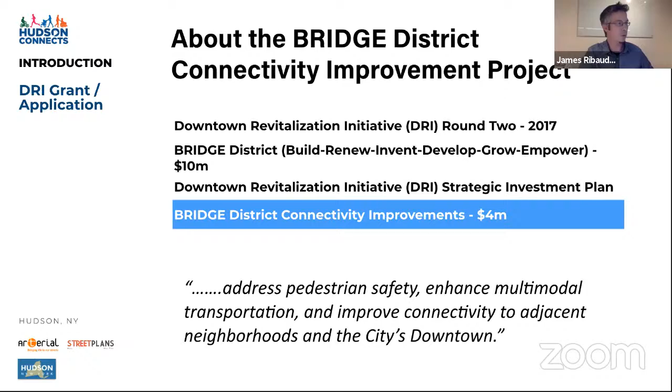From a schedule standpoint, where we sit right now is the fall, winter of 2020, where we're presenting the connectivity plan. We look to have a final submission in late January, and we'll have some more next immediate steps at the end of the presentation. And then the exciting part, which is getting into construction. The idea is to begin construction in the fall of 2021 so that this project will become a reality very shortly.

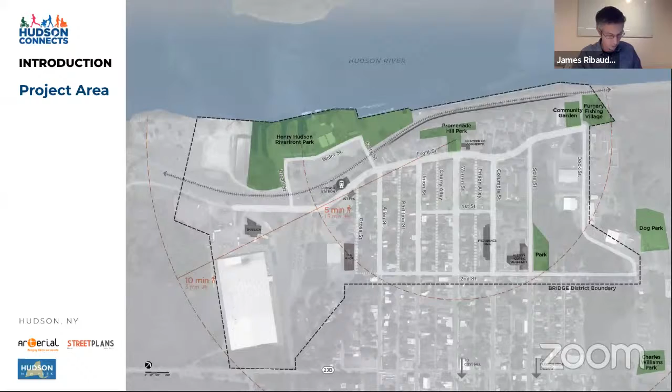So looking at the public outreach and analysis process, we wanted to just quickly take everyone through what we have been doing over the last several months with the project. So the first thing we did was we met and did a walkabout. We did a public workshop where we actually got on the street and we walked around with a group of people, and we took in all of the observations and the things that people saw, that they experienced from a day-to-day standpoint in their neighborhoods.

From that, we also then conducted our own, what we call a high performance street analysis, where we look at the condition of the streets. We see, in relation to the categories that Dave laid out, how the streets are performing in those categories, and what deficiencies may exist.

Third, we conducted a number of stakeholder meetings with various groups to understand the concerns and aspirations that both local residents and professionals had for this project. And then fourth, we had an open house down at the waterfront.

We actually combined this open house with the Promenade Hill Park project, which is another DRI grant that is concurrent with this project. And again, it was to collect some feedback, share some of the feedback that we've heard, put down on paper some of the initial thoughts and ideas.

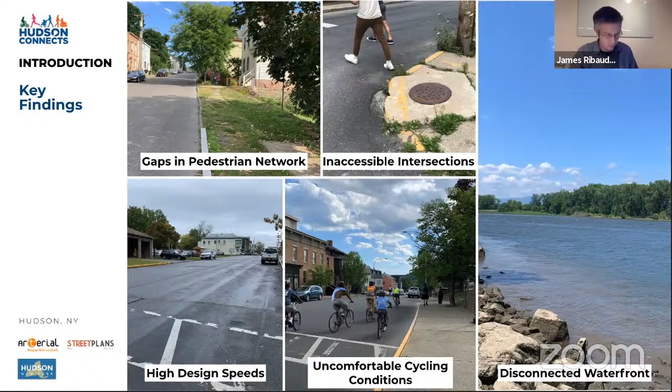Based on those key findings, we developed a series of goals that we feel will address all of these key findings. And the 3 goals that we're setting forth for the connectivity plan really address these findings. And they're not listed in order of priority, but really to best serve the presentation for this evening.

So the first goal is to celebrate the historic integrity. The second goal is to make streets safe and accessible for all. And the third goal is to reconnect the waterfront. And we'll elaborate on all 3 of these goals now as we move through the presentation.

So goal 1, celebrating the historic integrity. As one of the first planned cities in America, the history of the city is still evident today. And it's really an amazing quote that we think is very appropriate, just to remind us of the history of Hudson, that it actually has been referred to as one of the richest dictionaries of architectural history in New York State.

So the streetscape really should provide a ground plane that supports the historic fabric that exists in Hudson and does not detract from it. So the materials themselves should be authentic and reflect that history.

And I want to make a point of it here because it was mentioned in the survey on the demonstration project that the bright colors of the demonstration project were done to bring attention to the project and are not necessarily emblematic of the palette that we are proposing. And again, we are taking the cue from the history of the city itself.

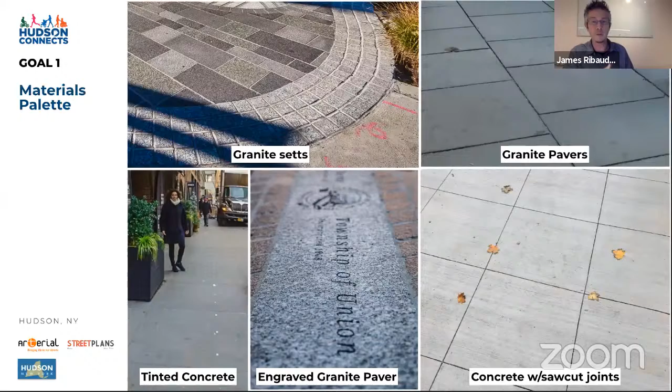The trash receptacles, the bollards that we may use, bike racks as you see, the tree pit guards, and then a family of benches that can be used in different situations where we may want to have a backed bench where people are going to stay and linger longer. We may want to have a backless bench so that you can sit on both sides, and a smaller bench for smaller areas and tighter areas and that kind of thing.

So the furniture and materials palette, again, we feel complements the diversity, the sort of richness in that history of Hudson itself. So with that goal, those are the visuals to keep in mind as we then start to progress through some actual improvements that we're going to show you on the street.

So coming to goal 2, where we want to make streets safe and accessible for all. So the way that we started looking at this was, the first step was to identify the streets based on their character and function. So looking at that, this helped determine for us the typology, which we've categorized here, which I'll go through in a second. But that begins to help shape for us what improvements should happen on what street.

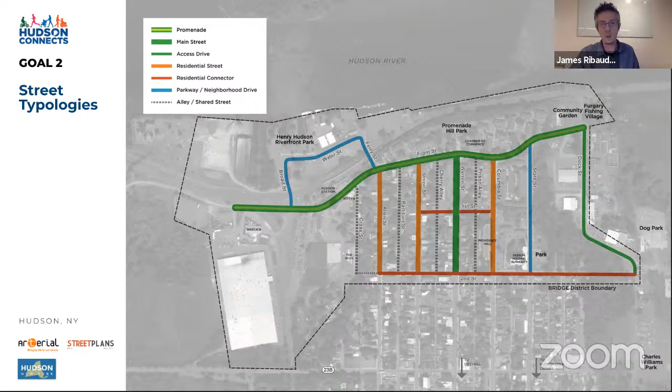And with that, we get to the intersections, because it's important for the streets to obviously be accessible, but if the intersections aren't, then those streets can't be stitched together. So it's those intersections that are very important, that they are, again, made accessible, given the right amount of improvements to really take those streets and stitch them together. And we have categorized the intersections within the district in 4 different categories.

The first being where the alley intersections hit the adjacent streets. And again, those are smaller interventions. Then there are the standard intersections. The standard intersections happen at various points within the city, and we'll go into their treatments as we move through the presentation. Commercial intersections are those intersections that interact with Warren Street, obviously being the main street in the city. So those have different uses around them. They have some retail and commercial spaces adjacent to them, whereas the standard intersections are more residential in character.

And then finally, the last category is unique intersections. And the unique intersections are intersections that have unique circumstances and situations and adjacencies that we feel should be addressed in a different manner than the commercial and standard intersections, and actually present opportunities to further express some of the character that we want out of these streets. So for instance, along Front Street, you'll notice some of the unique intersections land on those streets. And it's really a way in which we can tie the waterfront to those intersections and bring that connection from the waterfront to the city.

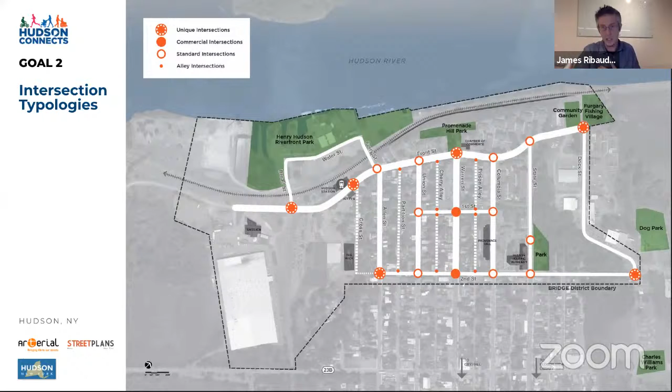The next layer is that of a bicycle network. And currently the Empire Trail comes down Mill Street, goes along Dock Street, turns on Front Street, and then comes back up Allen and out via 3rd Street. So naturally this places bikes on Front Street, which, given the number of amenities and destinations, we felt should be extended the entire length of Front Street, from basically Broad Street all the way to Dock Street.

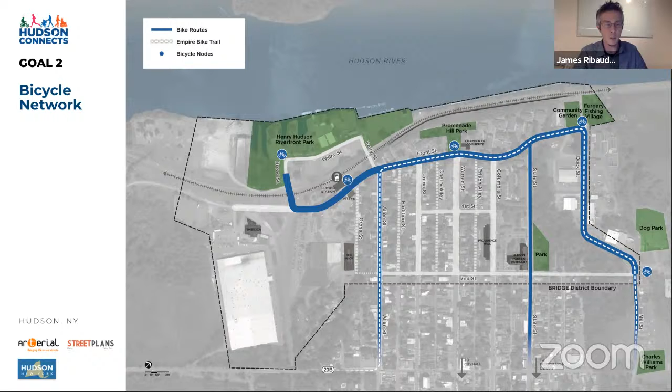And in an effort to better connect the rest of the city by bike, we've also identified Allen Street, which already has the Empire Trail on it for a portion of it, and State Street as the means in which the rest of the city can connect and move back and forth and get you all the way down to Front Street, to the waterfront, to the different park spaces that exist there. The other thing that we have layered in here are a series of bicycle nodes at key points you'll see in the parks, at the train station, that again support that infrastructure.

The next series of slides I want to quickly go through are the series of improvements that will be applied to various areas within the district. Things like pavement markings, lane and shoulder striping, consistency in the stop bars, high visibility crosswalks, all important when it comes to pedestrian safety, and then also cues to slow cars down and provide the proper movements for them.

The next is curb extensions, and there are 3 curb extensions that we see being utilized. A standard curb extension where we're extending the curb and maybe it's just pavement; using that curb extension as an amenity area where either outdoor cafe tables and chairs can be provided that can support local businesses, or public seating that the city would maintain and care for. That again gives people the opportunity to sit and relax, especially important from an economic standpoint as people are window shopping and that kind of thing. And then finally, utilizing curb extensions for green infrastructure where we can utilize plants and that kind of thing to infiltrate some of the water and take some of the burden off of the system.

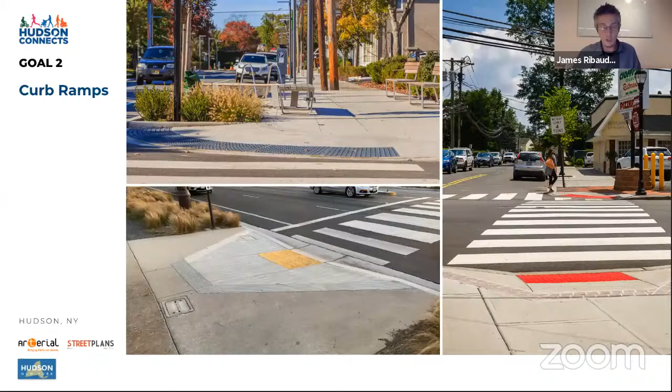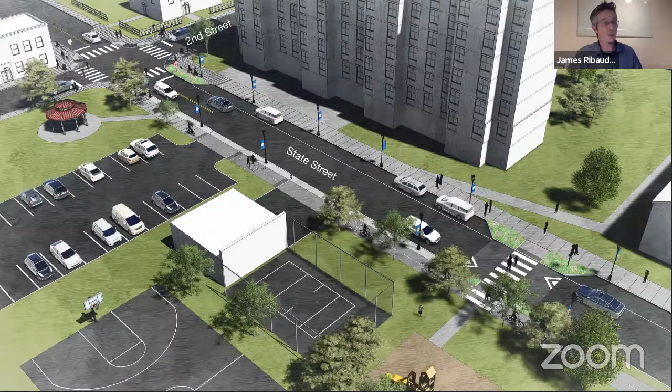And what we'd like to highlight over the next series of slides is the intersection itself and how we treat that intersection, taking, again, those elements and applying them to the street. We've talked about a shared use path. And again, this being critical because there currently is not a sidewalk on this side of the street. So we're looking at a shared use path that can connect 2nd Street all the way down to Front Street, off-road for people on bikes, people walking, strollers, to accommodate safely those users. And then finally, the last component of this corridor is a raised mid-block crossing, which you can see here.

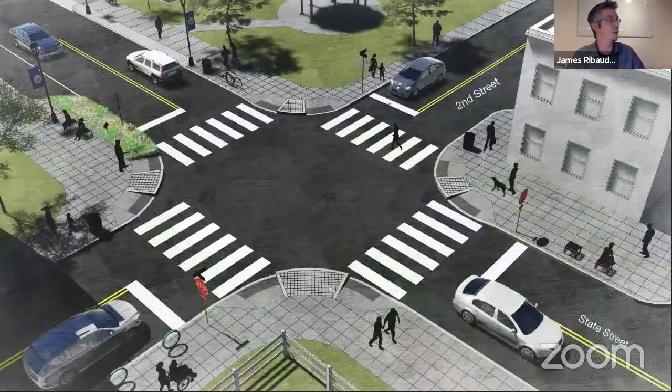So what I'm going to do now is put the intersection on the screen here, and you can see 2nd Street running from the bottom left of the screen to the upper right, and State Street itself running from the lower right to the upper left. And just going to highlight some of the improvements here. ADA curb ramps, high visibility crosswalks, the striping with the stop bars, stop signs, layering in some street furniture in benches and bike racks and trash receptacles.

In the left side of the screen on that corner, you can see where we've gained some additional planting, and that can be an area where we utilize green infrastructure. We can incorporate some educational signage in that. And these are the types of improvements that would make up this particular intersection, but could be applied to other standard intersections throughout the city. And we're also showing concrete saw cut lines in this image.

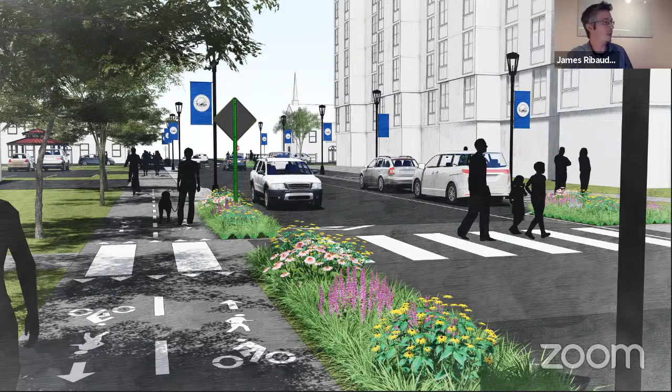I'd like to then move down eye level. If you notice here, we're standing down past that mid-block crossing, looking up the left side of State Street, where currently there is no sidewalk. And you can see this shared use path here, where again, people on bikes, walking, strollers, and that kind of thing would have a great facility to go from 2nd Street all the way to Front Street.

And then finally, within this corridor, showing a raised mid-block crossing, really bringing prominence to the pedestrian and their safety as they cross this portion of the street. There is obviously a number of residents that live in this area and that access the park on the other side there. So it's important that cars see them, and it's very visible with signage and actually tabling this crossing. So as you approach it, the asphalt actually comes up to the curb level, the sidewalk level, and levels off so that people are crossing at the sidewalk level.

And again, finding ways to incorporate some green plantings that bring color and bring some vibrancy to the street. We're also showing in this rendering for this corridor lighting, and we would have to again look at that if this is something that we move forward with in the first phase of construction, and how we supplement the lighting that's there currently. So that's an example of a standard intersection and how that can be applied throughout the city, an example of the shared use path along the State Street corridor, as well as a raised mid-block crossing.

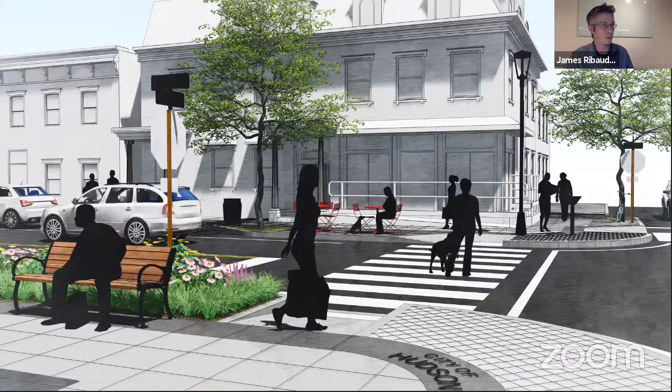So moving along to a typical alley treatment. And we're going to look at, this is Cherry Alley and Front Street. And the improvements here are simple. Basically adding a driveway apron to raise the level to the sidewalk so that it, again, gives priority to people crossing here. We are recommending maybe cobblestone aprons to, again, tie into that history. And then where possible, stop bars and signage to make sure that vehicles are stopping before going. So reinforcing that safety for pedestrians.

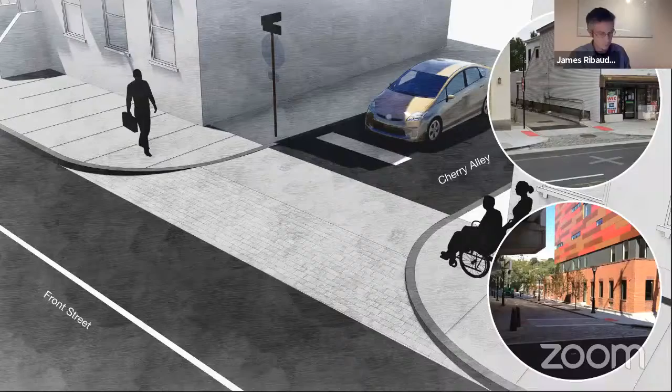So goal 3, last goal to go through, reconnecting the waterfront. Again, Front Street is this great street going the length of the Hudson River in the city. And we really want to celebrate the various connection points to the Hudson River. You have Henry Hudson Riverfront Park, Promenade Hill Park, you have the community gardens and the fishing village. And these things really should tie into Front Street and give Front Street that character that really connects it from the city to the waterfront itself.

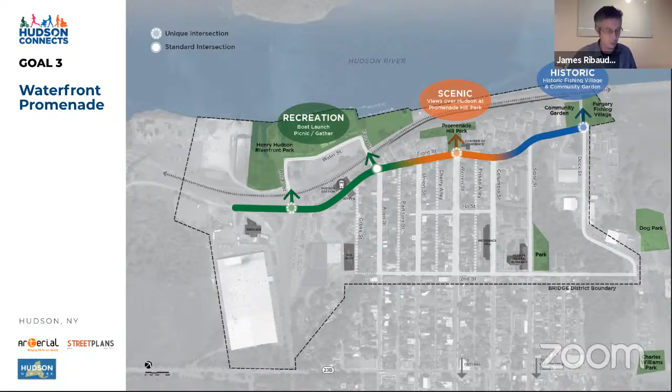And then looking at another spot where one of the demonstration projects was installed at Front and Warren Street. And we want to look at this as a corridor. So we're looking at Front and Warren Street, really Front Street from Allen to State Street. And currently, the way that section looks is like this. There's 10-foot sidewalks on either side, and parking and travel lanes that essentially add up to in the neighborhood of 42 to 45 feet, give or take, depending on where you are. Again, we don't have a survey at this point, but we've measured, and roughly that's the makeup of the street.

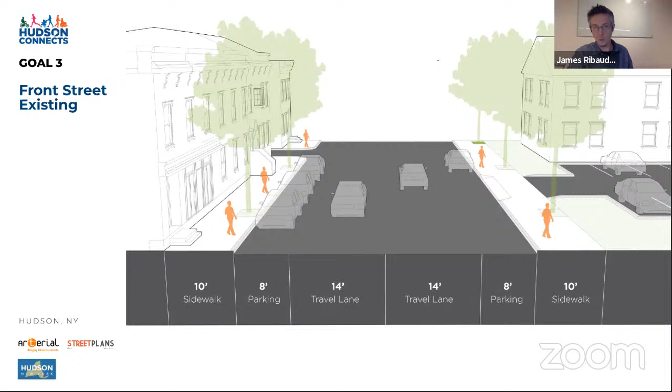And what we're proposing is changing the structure of the street and adding a promenade on the water side of the street. And we're doing that by taking some of the sidewalk and also taking some of the width out of the street.

And you can see that here. So the main point here to make is that we're looking at capturing a 16-foot promenade along the water side of the street, where we can have basically a 5 to 6 foot sidewalk, an 8-foot shared use path, and a 3-foot buffer, and keep the on-street parking that's there. That was very important as we move through this process.

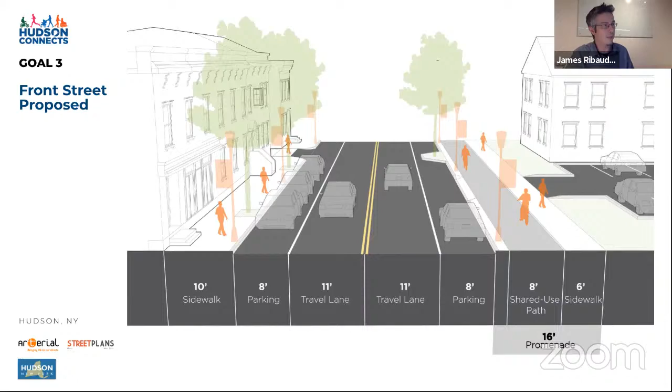We recognize that we have to get into the detail of this. There's minimal parking spaces lost with doing this. There may be a space or two or so that we may have to lose, but for the most part, we're able to keep all of the parking along that side of the street. So moving to a plan to see how that shakes out.

And then just dropping down to eye level here so you can get an idea of, again, what that may look like. The shared use path here in the foreground with the sidewalk. You can see the engraved granite paver there, Promenade Hill Park, some of the plantings and the boulders and the stones, the intersection being raised itself, really, again, accommodating pedestrians. So in a very quick nutshell, that's how some of these improvements can be applied.

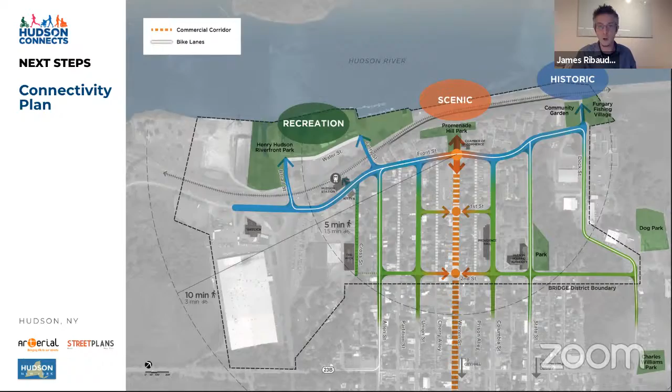And in terms of next steps, we are working on the overall connectivity plan. This is a diagram that kind of depicts all of those improvements and how all of that functions together to pull the waterfront into Front Street and how the streets stitch together, those intersections, everything like that, where we will then provide a level of detail that you won't be able to read most likely on your screen, but a series of matrices that outline each street, the different improvements that we're proposing, and which street gets what improvement.

So we're doing that for both the streets themselves and the intersections. So for instance, Allen Street needs to get concrete sidewalks. There needs to be some repair work and tree pits, and so on and so forth. So both for the streets and the intersections themselves.

And just to end on the project schedule in a little bit more detail, where we are right now is council presentation number 1. This is the first time we are presenting in front of the council. We plan on collecting feedback, getting some thoughts on what we've been proposing, making any revisions necessary, continuing to work through the plan so that we can give order of magnitude cost and start to talk about phasing and implementation of the project itself and what will be built.

So we will present on January 11th at the council meeting, where we'll focus more on what the project is looking like it's going to be for construction. We'll submit the final connectivity plan at the end of January, and then basically start to look at design and implementation of the project that is identified.

So with that, I want to thank you all for your time. And at this point, I'm not sure how this will work, but if there's any questions or different things like that you'd like to ask of myself, Dave is there as well. We can answer any questions that you may have. So we'll begin with council questions first. And I know Tiffany Garriga has a question.

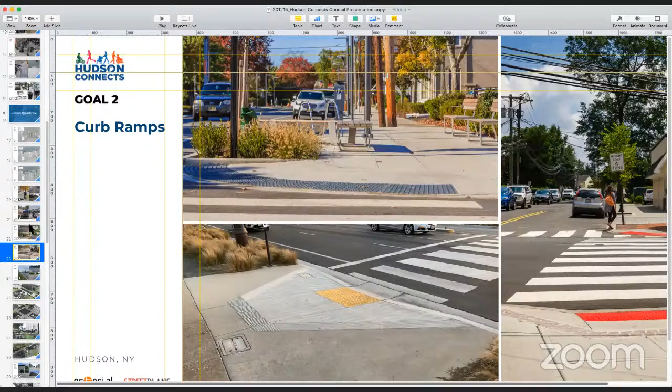I was taking pictures of your examples there because I want to show my constituents. But I have a suggestion just because of the constituents that I talk to and work with that are in wheelchairs. That was the one picture I wasn't able to take when you showed the different examples of the squared concrete joints and the granite, the concrete and a tinted concrete, I believe. Was it this? Yep, that's it. So let me take a quick picture of that. So just a suggestion. I think the flatter, the better. Yes, the granite setts is beautiful. So is the one in the bottom middle.

But just knowing how, and we also put a video out on YouTube, just seeing how people with disabilities and senior citizens walking with their walkers, they somehow get in between those cracks, like in between the bricks and stuff, and they get stuck. And when they get stuck, it can jerk and they can fall over. So just keep that in mind. Like the flatter, the better.

Absolutely. And just to let you know that the granite setts that you see in this image, where we were proposing using them, were not in the path of travel. They were highlights at places that people aren't walking.

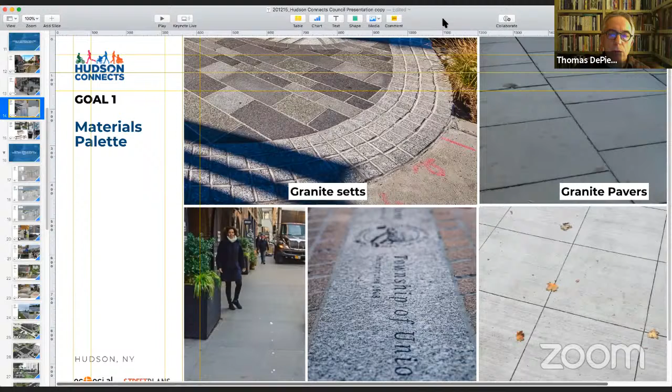Okay, anybody else from the council? Oh, okay, even better. Thank you. Thank you, Tiffany. Any other council members? And quickly, anybody from the public? We want to wrap this up pretty quickly since we have a long meeting tonight. Anybody from the public? Okay, I have Aaliyah Schneider.

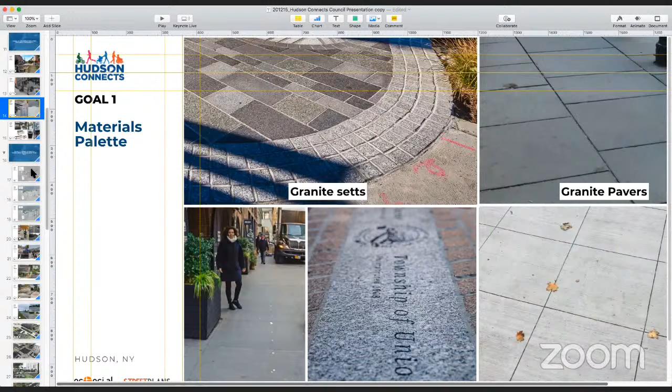Hi, thank you. Could you clarify what the steps are going to be in between now and the next presentation? Sure. We're going to be collecting any further feedback from the council and their comments on the plans themselves, working with them to begin looking at the cost implications of these improvements and how we can best spread those costs out to cover as much ground of the district as we can, to determine what are the priorities, where do we want to see the money spent, and improve which corridors, which intersections, covering different gaps and that kind of thing. So we're going to have those discussions.

And then at the next meeting, we'll present basically the summary of that and what we think is the way in which we're going to move forward with the construction dollars and what that's going to cover. Does that answer the question? Yes. So you'll be discussing with the Common Council. Is that? Well, through the steering committee that we're working with, which is led by Tom and Michael Chameides. Oh, okay. Thank you.

Okay, David, James, Said, thank you very much. Appreciate it. We're moving on. Okay. Thank you very much. Appreciate it. Good night, gentlemen. Thank you. Bye. Okay, back to the main meeting.